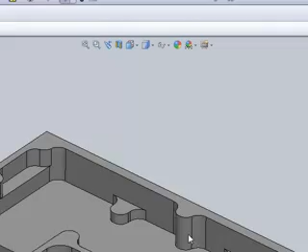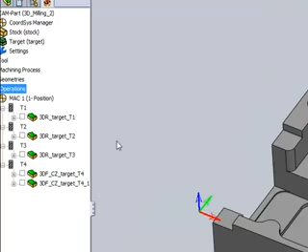You'll also see that there are many different depths within the part itself. These steps over here, for example, these little pocketed areas inside over there. And what we're going to do is use 3D machining to mill out every single one of these areas. In our first operation, we've used a rough cut. And if we take a look inside the operation itself, we'll be using a 14 millimeter end mill.

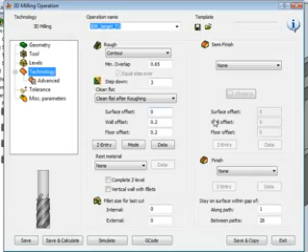And in the technology area, we'll be using contour, stepping down every 3 millimeters and cleaning the flat floors on our way down when we finish going down towards the bottom level. We'll also be having a wall and floor offset of 0.2 millimeters.

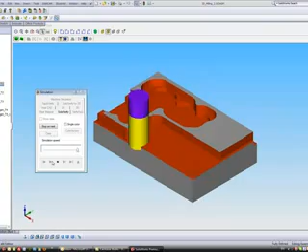If we take a look at our simulation and we use the Solid Verify simulation, you'll see that it clears out the part and does as much as it can do for this size tool, taking out a large bulk of the material.

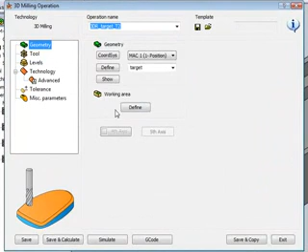Now in our next operation, we're going to continue using a rough cut, but this time I only wanted to work in the areas where the previous tool could not operate because that tool was a little bit too big. So if I go into my operation, you'll be seeing that we're using a different tool, a smaller end mill this time. And in our geometry area, in our working area, we've chosen the option of cut only rest material. That way it'll only work in those particular areas.

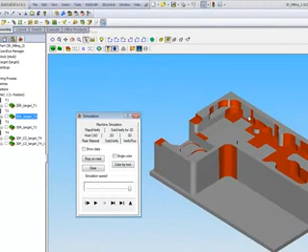If we take a look at our simulation, you'll see that it is now only working in those particular areas, in these areas over here where we could not go to at all, and cleaning off those corners as well.

We've done the same thing with our third operation, also using a rough cut and using this time an even smaller end mill, such as a 5 millimeter end mill, using the same technology as we did before. And again, in our geometry, we still have our working area using cut only the rest material.

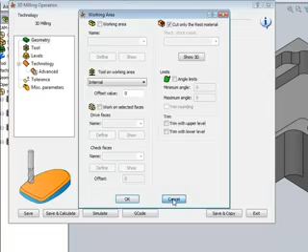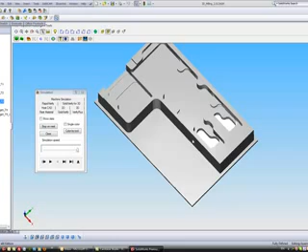Again, looking at our simulation, you'll see now that it'll only work in those particular areas over there. And if we turn the part and look inside over here, it'll finish whatever area this tool can work on, including this pocket inside over there, which the other tool cannot do, and only work in those areas.

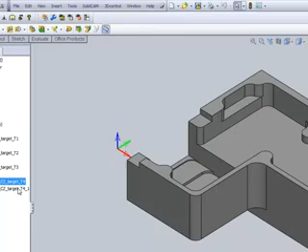In our next two operations, we'll be doing our finish cuts, and when we work on prismatic parts, we will always use the finish options of constant Z, both for the walls and for the floors. If I take a look at my first operation over here for my finish cut, we'll be using a 4 millimeter end mill, and in my technology for constant Z, we'll be stepping down every millimeter.

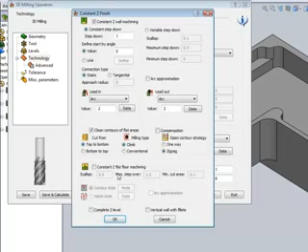We will not be using scallop. We'll be having a lead in and lead out of 2 millimeters. And we'll also be using the option of clean contours of flat areas. However, we will not use the option of constant Z flat floor machining. We'll use that in a separate operation.

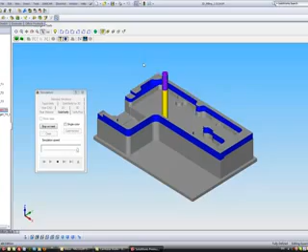If we take a look now at the simulation of the part itself, you'll see this time that it's actually working exactly on every single one of those walls around the part, stepping down every 1 millimeter. And when it gets to these flat areas, it'll also clean those corners as well, finishing up every single wall that's on the part until it gets to the very bottom of those walls.

Now in our next operation, we'll be again using constant Z with the same tool, but this time if we take a look in our technology area, we'll be using constant Z using the constant Z flat floor machining option, not using the constant Z wall machining because we've done that already.

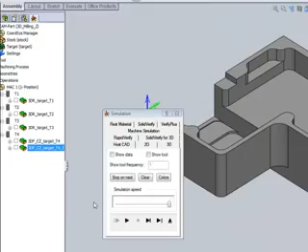If we take a look now at our simulation of the part, this time you'll see it'll work only on the flat floor areas, including the very top of the part itself, finishing off every single one of those areas.